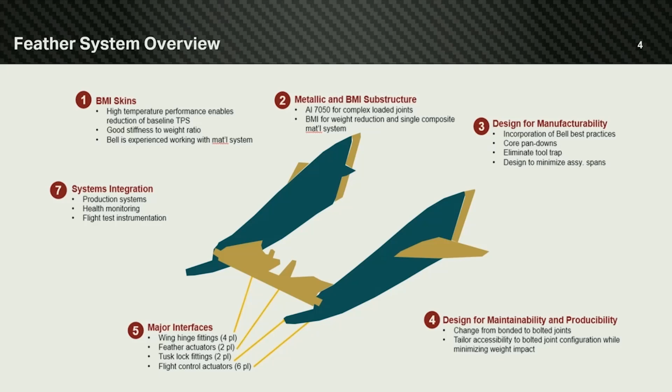So their thermal protection system previously was painted on or applied in a very imprecise way, and they had to sand it down to OML, and it would sometimes crack, and it was a huge maintenance burden. So their goal with the Delta program was to get rid of all that thermal protection system. It's a huge weight benefit.

They switched to BMI instead of the carbon epoxy material system that they had previously, and that was sort of the play there to improve the maintainability and the takt time and all that stuff. So we used metallic substructure and BMI substructure, metallic at the complex loaded joints, the big joints.

We had to design for manufacturability, producibility, so they were big on takt time and turn time, so they wanted to be able to go from producing one spaceship per year, which is kind of the rate they could do before, to 3 spaceships per year. So we had to configure the joints in a manner that enabled that.

We also had to configure the joints for logistics, right? Because previously Virgin Galactic had built all of these in Mojave, in their Mojave facility, and it was all hand laid up, and they had bonded joints, and they could build it up in one piece.

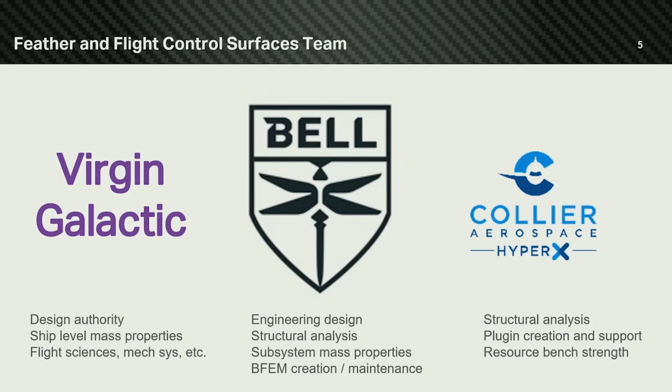They keep the ship level mass properties. They take care of the flight sciences, mechanical systems. But Bell is the detailed design, the engineering design. We do the structural analysis. We do our own accounting of the mass properties. We do a BFEM, we maintain our own BFEM, and we do the maintenance of that.

But then, so where does Collier come in? I'll talk a little bit more about it later. But the Collier team's role in this was really around - they were a supplement to the engineering analysis stress team. So they performed analysis, they supported part releases all the way through preliminary sizing to detail sizing to part release, and SCN creation and all that stuff.

They also supported plugin creation and then resource bench strength, which means a lot of the time we had things that came up and James and the team were able to flex and find somebody who potentially has a little bit of downtime to pick up some extra work for us when we need it the most. And that's important because then we don't have to go hire more folks. We don't have to figure out, when there's less work, what to do with those folks. So James has plenty of other work for them to do when the need is not as high.

All right, so the rest of the presentation, we have 3 other presenters. The rest of the presentation is going to be structured like this, and we'll kind of go left to right across preliminary design, weight out challenge, and detailed design. But we kind of wanted to give you all our perspectives on the different phases of the program.

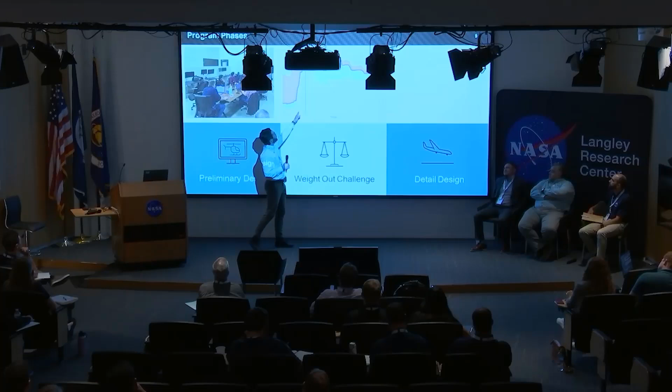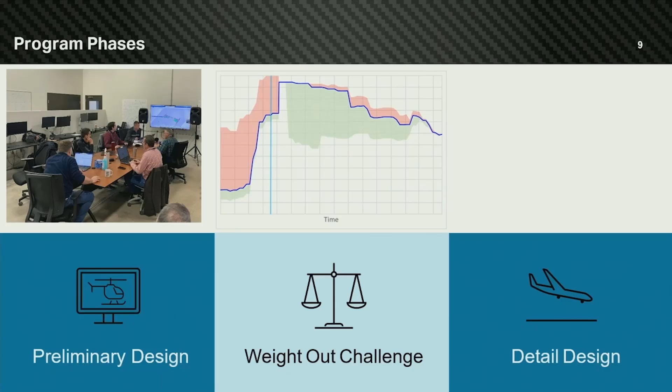We came up with a long list of opportunities, and you can see what we decided to do after CDR was absorb all of the weight risks, which are the red, and the opportunities, which are the green, and we said okay, that's status weight. Then afterwards all the green comes in, that's our list of opportunities that we put together as a team during the weight out tiger team.

But you can see since then it's marched down over time. I'll say that we've gotten to under our target weights. So we pulled about 500 pounds out of a 3,500 pound feather system. It's been quite a journey, but it's looking like we're getting there.

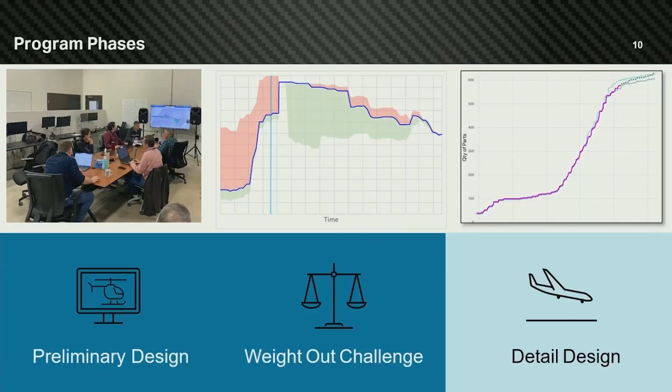And then detailed design. This is the part release burn-up chart, as we affectionately call it. Time is on the x-axis, and quantity of parts we have to get out the door each week, tracked at a very detailed level. At one point we reached a peak release rate of 55 drawings per week, including left and right hand side. Very aggressive, lots of night and weekend work.

So at that point, this is where the power of HyperX helped us quite a bit. We had spent a lot of time setting up our SCNs, as we call them, strength check notes, which is really just a stress report, to accept output straight out of the HyperX database, so our margins are getting printed right into the stress report. We had it set up real slick, so that definitely helped us quite a bit in the detail design phase.

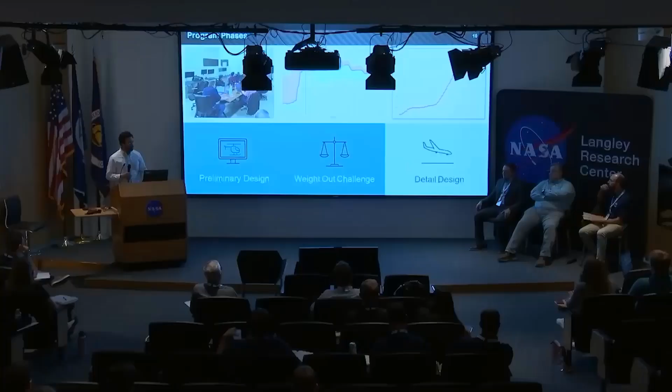All right, and without further ado, George, turn it over to you.

All right, hello everybody, I'm George DeLeon. Thank you for the introduction earlier, Brent, you really covered it well. As he mentioned, this is my first stint as a manager of a team. For 17 years I was an airframe stress engineer, or at some points stress lead, so it's also my first time working on a space vehicle. As you can imagine, two new things happening all at once, it seemed a little daunting.

When I first heard the team was going to be deploying HyperX, that was my one thread, honestly, because I had spent plenty of time working in HyperSizer, and the similarities to me are striking. That was a silver lining in running into the team and the challenges head first, that they were going to be using HyperX, and I said to myself, I can help there. I think I can help organize the team and orient ourselves for success. So a little bit about how we did that.

In the preliminary phase, just for time purposes, think back to late 2023, fourth quarter 2023. Basically our structure was in place, not without issues. There were still load path issues internally, which we were teasing out as we put more stress eyes on the substructure. But that's not what this story is about. We were essentially ready to begin preliminary design.

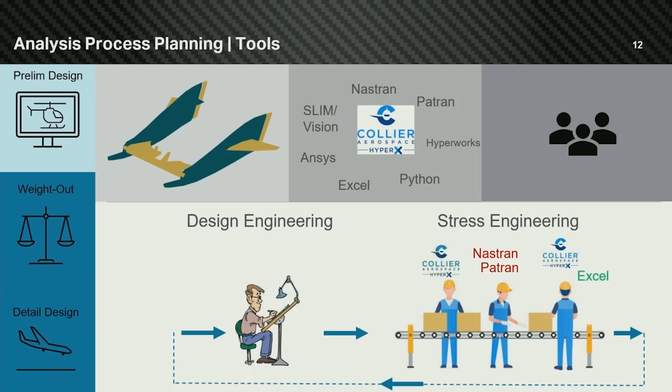This cartoon—I think this is, in my brain, what designers and stress engineers look like. The designers are a little more laid back, working late hours with their little lamp. The stress engineers are a little more rigorous—we for some reason dress similar, more conservative, more careful, with the hard hats.

All right, so a little bit of a deep dive into these analysis steps. I mentioned that the first pass—we'll call them point guard—takes the part and takes ownership of it. That's your main point person who interfaces with design, doing the initial acreage sizing, and for the most part we use HyperX for that entire step.

There are some key locations, some chunky parts, some detailed parts where we didn't feel comfortable yet with the use of either lug analysis or KT features, so we wanted to deploy other tools we felt more comfortable with at the time. But for the most part, that initial acreage sizing is heavily HyperX.

The next step, our stability analysis, was a combination of HyperX and Sol 105, as many of the presentations have mentioned, the use of Solution 105, Nastran.

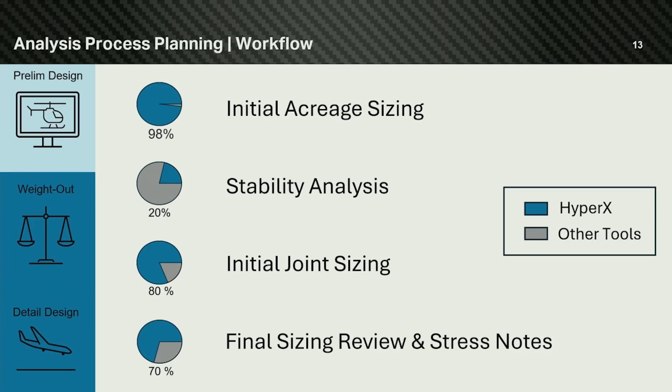Okay, so initial projections of our tracking of the feather to our current point, as already mentioned, was not looking good. I can't really undersell how much our backs were against the wall. We were roughly 16% heavy, or heading in that direction anyway, and we needed to do something about this. It was pretty much an existential crisis to really get that weight down. We were at an impasse, we couldn't really be there or close to it at all. So the goal became: get 500 pounds out of this structure, however you need to.

So naturally, we got to exploring everything. All right, what got us here? Not from the standpoint of pointing fingers at anybody or any tool, but from the standpoint of fixing the problem. So we inspected everything - whether it was the way we were arranging our folks, the tools, the processes, the workflows, all of that. We came to conclusions that it was nothing related to that.

It was all about the methods and the approaches. So what it came down to is, almost as a culture or as a way forward, we were fine-tuned to the KPP of quick turn time, and we were kind of overly focused on eliminating risk on first pass yield in development of the parts, which is a good thing, but we overswung the pendulum in that direction, and it was time to really scrutinize that.

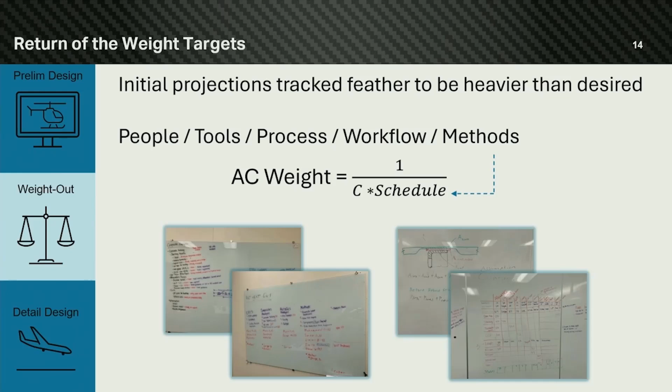So at this point in time, like Carrie mentioned earlier, we had a lot of eyes on us - leadership at Virgin Galactic, leadership at Bell. We all got closed into a room and said, all right, throw everything and anything, any idea you have, put it on the whiteboard. Let's start talking about it, let's start thinking about it. That's actually a picture of four different walls in a room that we just filled up - we probably ran out of room. Not intended to convey real information, but just to state that this was the moment to put everything on the board.

Basically, go back to square one where we needed to, but also don't forget we have to do whatever it is we do to solve our way out of this. We got to do it very fast, and now even faster than originally.

The bottom right corner there is kind of our design of experiments, if you will, just a hand hack at it, because we knew that we wanted to know how some of these weight savings ideas interacted with each other and all that.

So with that, we could not just let it be the Wild West. We couldn't just take ideas. Again, I don't believe in telling all the engineers, here's the ideas, go run, do them all. No, we had to study them. We had to wrap our arms around them. So this is intended to help describe how we went about doing that.

That's not a martini glass. That's a funnel. We'll call it the funnel of sanity checks. Basically, we pumped all the ideas through studies.

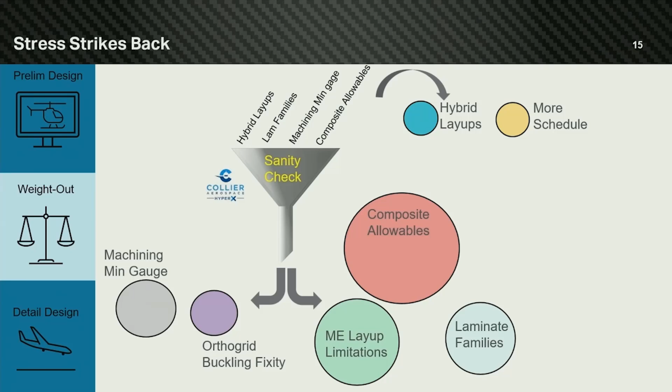And then the ones that didn't quite make it, I'll say we didn't necessarily say, okay, no, never. We just said, let's put them to the side for now. And we ended up calling these Group B weight savings, and Group A weight savings. The Group A, we were just going to do. We're going to incorporate them and organize ourselves to go ahead and put them into motion.

The Group B were a little more costly or a little more time consuming. One is just straight up more schedule. That is the idea, just take more time. Multiple presentations today and yesterday just talked about how if you just keep going, you can save more weight. But we didn't have that time. But it is a Group B option that we had, such that for a given part, if we're not meeting the target, there's an option still. Let's go revisit it. Let's just sharpen the pencil on it.

It would be impossible to tell you guys how many, and really describe in that much detail how many ideas we came up with. It was more than 20. And the way that the team performed and knocked these out, it was pretty incredible. Not just our team, but the Collier team that was on board helping us.

There were cases where we'd still be in that meeting room with the executives, with the leadership, chief engineer at VG and everything, and we said, well, we'd really like to understand this one or this other one. Maybe it was including uniaxial tape along the lands of caps, or just shifting gears on a safety factor — not a safety factor, but an uncertainty factor that maybe we were a little too conservative on.

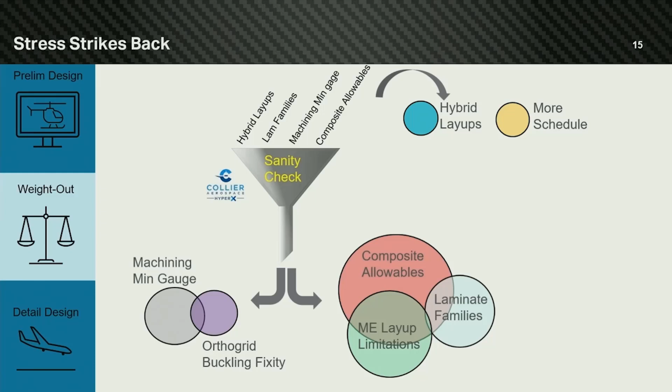So before just reporting out to leadership, hey here's the total amount of weight we can get out, we said we've got to deal with this problem. We have a lot of overlap, a lot of losses in trying to pump all of these weight-saving initiatives into the design at once. But at the same time that we realized we had a problem, we kind of said, wait a second — we got a solution too. We got databases that we can run with all of the weight savings initiatives at once, or even combinations of them.

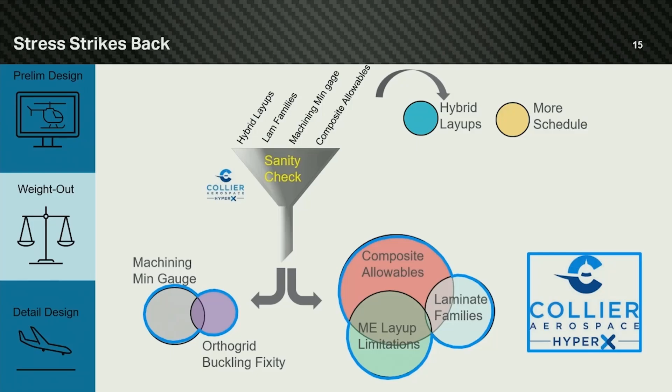So without HyperX available, this either leads us to the wrong answer — and what I mean by that is we pump the brakes too early, we don't look for more weight and we start moving — or we just slip schedule badly. This might be, from my perspective, the biggest takeaway from how we solved this problem. I think what we ended up doing in a matter of 2 to 3 weeks would have taken easily 2 to 3 months, if not more, with other tools.

So coming out of all of those studies, we came up with this workflow. And again, I've got all the pieces of the workflow where the HyperX tool is kind of involved.

So like I mentioned, we had Group A sizing ideas and Group B sizing initiatives. This is the way we ended up treating every part as we went through our sizing. We would start with our Group A sizing — okay, just size it, implement all of the approaches that are going to save us weight. Then, all right, let's check the part. By this point, we had spent time developing part-by-part weight targets for every single part. Obviously the important ones were the really big parts — we had high focus on the part-by-part weight targets on things like boom skins.

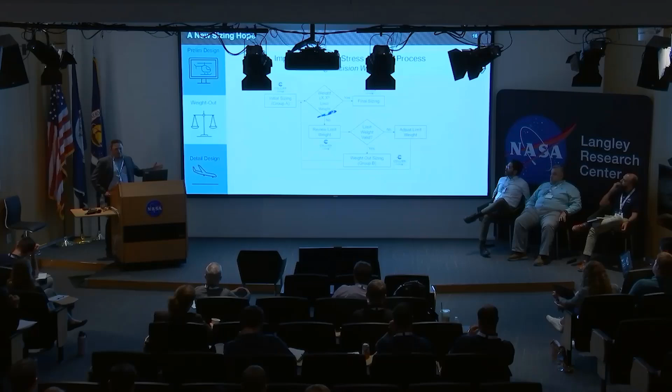So if it didn't pass your target weight, your limit weight, is it the end of the world? I don't know, let's see. We go down and review the limit weight. The reason I have a HyperX box next to review the limit weight is because HyperX was involved in performing those studies. Those limit weights, as they stood, leveraged what we thought we could do out of those studies. So it was involved. Maybe there was something up with how we performed the study, or maybe something else. Maybe we just got too aggressive with that one. So okay, you go through at least that sanity check. All right, is the limit weight valid?

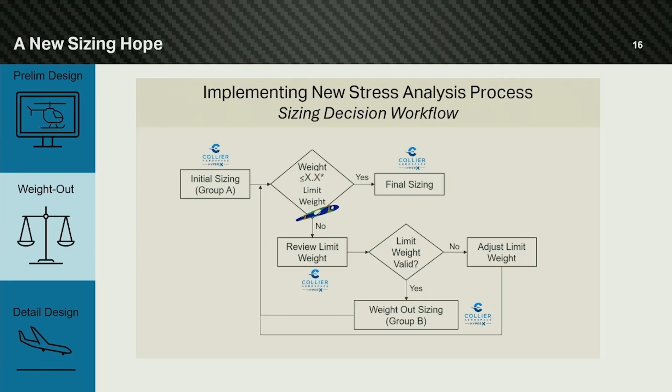No? Well, let's go ahead and adjust it, whatever it was. Let's put a fraction on it, even to the point of finding weight in another part within the same assembly or something. If it is a good limit weight and we really need this part lighter, all right, it's time to look at weight out sizing Group B activities, whether that's just passing back through, iterating a few more times, whatever it is for the part.

The feedback was literally, George, I think the hats are a little political. I said, I didn't write anything on the hats. I'm just being observant, our company logo is blue, and our Texas home, Bell, is red. Nothing political, I promise.

Anyway, so what I mean by landlocked is there was a really high importance in maturing the boom skins. You already heard about the scale of these things. They've got basically 22 or so core stiffened areas and numerous substructure components attaching to them. And the path forward, to really open up what we used to call the floodgates,

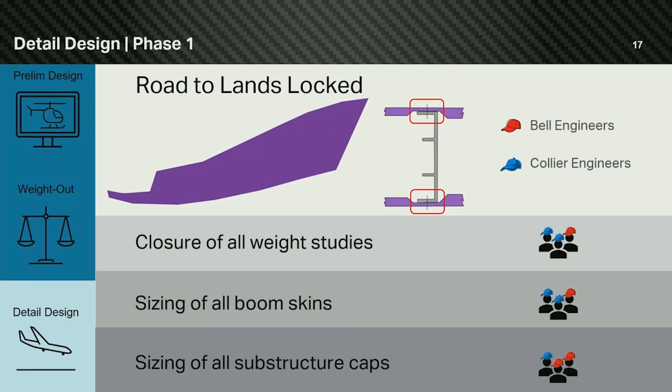So I guess I'll go kind of one at a time. And in this case, the hats are sort of indicating Collier versus Bell involvement. So I'll just tee it up this way. This was a point in time where we could have easily shied away with how involved Collier was as a partner, as teammates. There were leaders asking us, hey, is it time to pull back the boom skins? Do you guys want to tackle this phase and maybe give them substructure parts or something?

And I give a lot of credit to Max here. As we talked about it behind closed doors, and now to everyone, he said no, these guys have gone through iterations. I know we had a high weight skin, but nobody knows it better. Nobody knows the process and the sizing. With our guidance, let's keep them very involved and let us do the talking to the leaders. No, this is the way, we need Collier, we need the team.

And there was a lot of pressure on them. I mean, you can hear that from Justin and team. But they did it, man. They were up to the challenge for sure.

So at this point in time, we were needing all of the weight studies to close. There were some trickling in still. There were some even material trades at this point. Those were all kind of coming to a close. And we needed sizing of all the boom skins, and I mean almost every aspect of them, especially joints and acreage. The buckling, we kind of determined that some of the buckling could come in after, but really we needed iterations done, and we needed the joints and the acreage to be very, very firm. We needed to call that final.

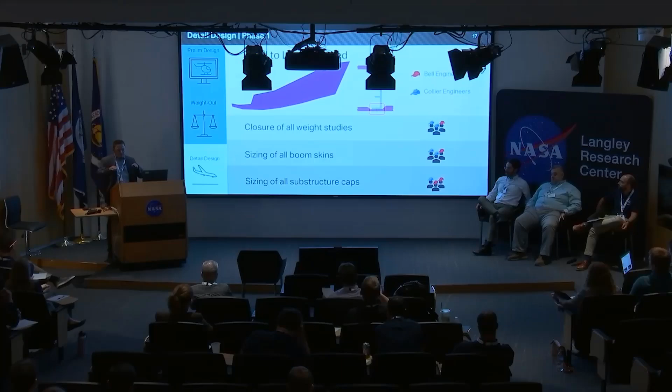The reason behind that is that we've got ply drop rules. Every company probably has their own discrete set of rules for how aggressive to reduce the layup. And if we went with an approach where you just pump meat into the land for the skin, you end up essentially trapping weight, because it takes so much distance away from that land to get that material out per our own guidelines—we were kind of eating more than we wanted to there.

So, without the amount of iterations and the abilities of the guys—I mean the iterations with design as part of it—I'm anxious for you guys to listen to Justin's part, where he's going to talk about how that interaction with design happened. Without all those iterations and all that time looking at it, this doesn't jump out at you. This is not intuitive. So we just leaned in. We said, no, let's just try to put meat in the caps and make it part of our weight savings approach. So, all right.

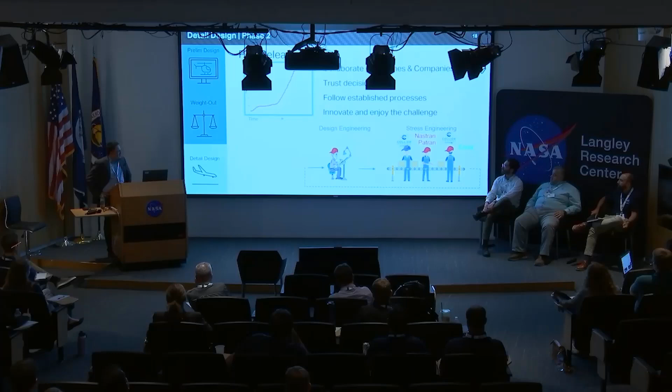Okay, finally, kind of repeating the part release grind that we saw earlier. I can tell you that essentially—I know there's no scale here—but in a matter of 4 months, I'd say 4 to 5 months, we got through our detailed part release, our 500 plus parts that make up the feather structure.

How did we do this? We just collaborated across all the companies—VG, Bell, and Collier. We trusted our early decisions. There was no backing down from it. Whatever we had put in as our process and how we had aligned ourselves, it was time to just double down on that, and that proved dividends.

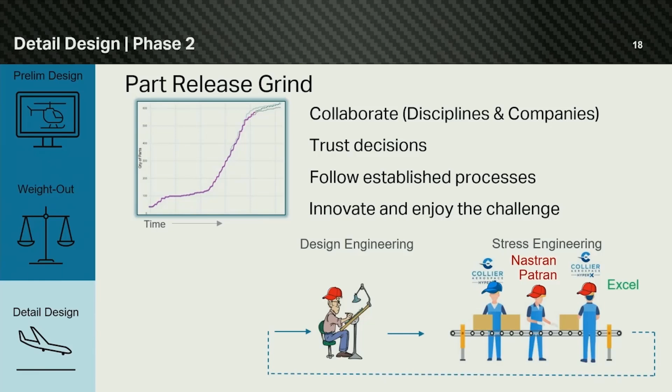And then so we established—we followed our established processes, and we didn't forget to enjoy the challenge. That was something that was hard to hear from my team when we were up against the wall facing this impossible challenge. I told them, this summer—last summer in this case I'm talking about—it might suck. We might be putting in some crazy hours. We might find ourselves pretty stressed. But at the same time, it may just be the most fun you ever had in your career to talk about later on when we succeed.

And so, anyway, it's really cool to be here telling you guys about how we approached it and how HyperX was used with manager level details. But I'm excited to let the next two guys, which I consider absolute ringers at stress analysis, go a little bit deeper and give you the real details of a few examples of how we went about it.

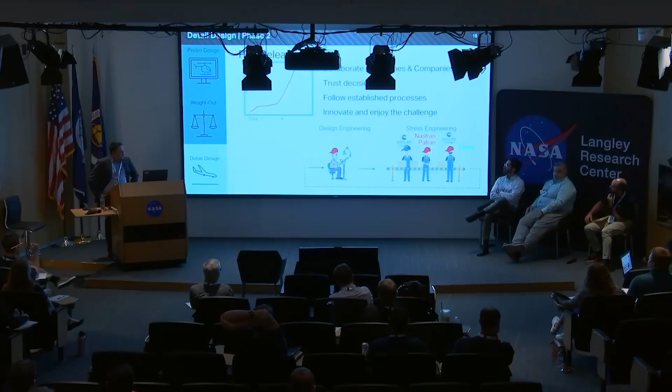But I mean, I can't state enough how we were operating basically like a machine. At this point we had the hats on, different orientations. The blue and the red at this point had crossed aisles—we're working alongside each other. So yeah, it's been fun, and it was just amazing to have HyperX and to depend on it as much as we did, and to challenge it the way that we did. So with that.

Hi everybody, I am Max Silva, stress lead on the Virgin Galactic program at Bell. And I love when my managers talk about how easy things are, package here, moving things around. But with that being said, today James said something that is very important.

HyperX was created for stress engineers, right? And to get to the point where they were presenting for you, there is a steep curve, especially going from a conceptual phase all the way to releasing.

One thing that's funny to mention is that Kerry was trying to find people within Bell that could join the program, right? And he found the most experienced people, very nice people. I know them all, like them all. But our average year of experience was 20 years.

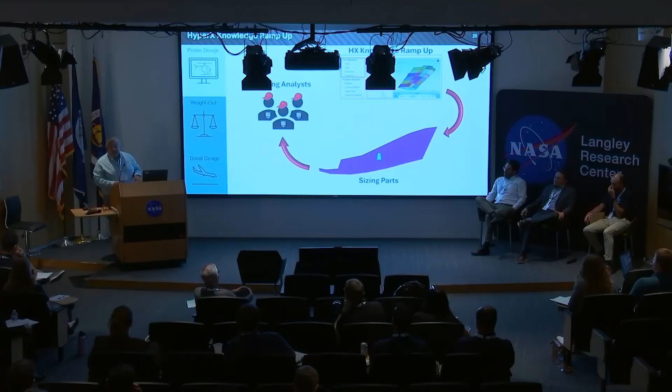One time George also asked me, hey Max, show me how to do the HyperX. So I go to his desk, and he starts clicking stuff. And then I just tell him, if you don't stop clicking, ping, I can't help you - because he was just click, click, click, click. It was so fast, I couldn't even do anything for him.

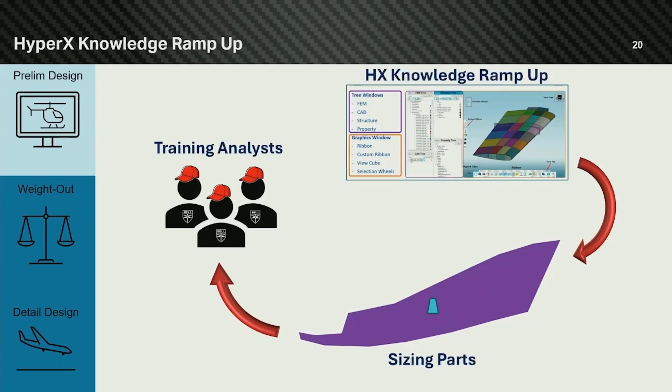But anyway, that's how my involvement with HyperX started. One week of experience, and all of a sudden I'm the guy, right?

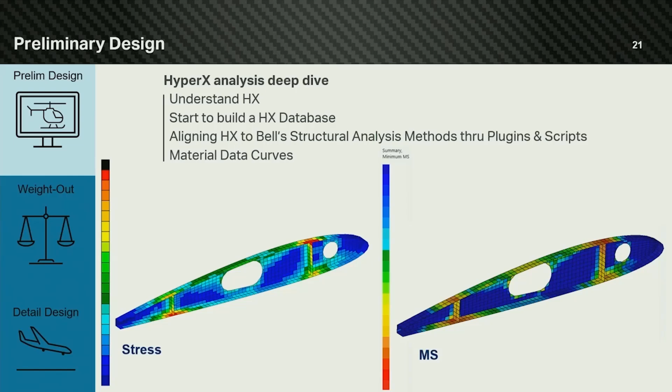They didn't take that easy. They wanted to understand why HyperX gave us margin of safety. They weren't comfortable seeing plots of margin of safety. I asked, what is the issue? They said, well, we don't know if it's capturing the hotspot. So what I did - this is not part of the program, by the way.

This is a different program at Bell. So what I did, I started playing with HyperX. You see two plots here - they're fairly identical. One is a margin of safety summary from HyperX, and this one is actually from Patran. If you switch how you see your stress levels, you can do an element field and stuff, and you can see on this one they're very similar - they're actually hitting the right spot.

So I had to present them by example. Hey guys, it is doable, just give it a try. And that's what I was trying to do.

It's okay, so they took it. They're taking it well, but they're still complaining, coming to my desk every day - a big line in there. Just like when you go buy cold cuts, they need to get the number. That's how it was. I became a 1-800 call - instead of calling you guys, they'll come to me all the time.

But anyway, that was fine. But we still need to validate and see how the tool pairs against the Bell way of doing analysis.

So there was a major setback. Some people were saying, no, we do it this way, this is the Bell way. I said, okay, so after training two very experienced guys and one young one, we decided to do a deep dive - let's go understand everything that we need.

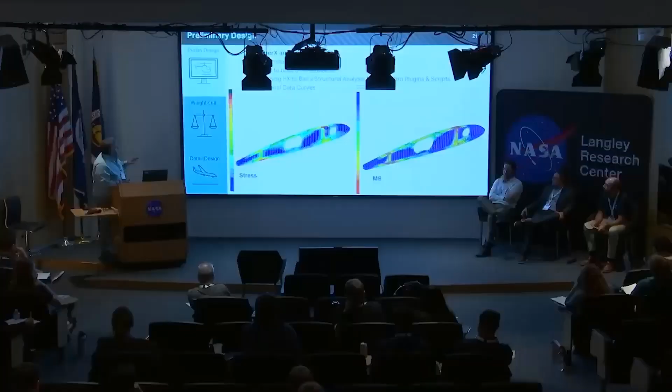There were a few people sat on the side who said, we need a new FEM because we cannot continue using a FEM that is not from this aircraft - or spaceship, need spaceship, otherwise they get offended. But anyway, that's what was happening for us on stress. They were discussing other stuff, but we were going crazy on our side.

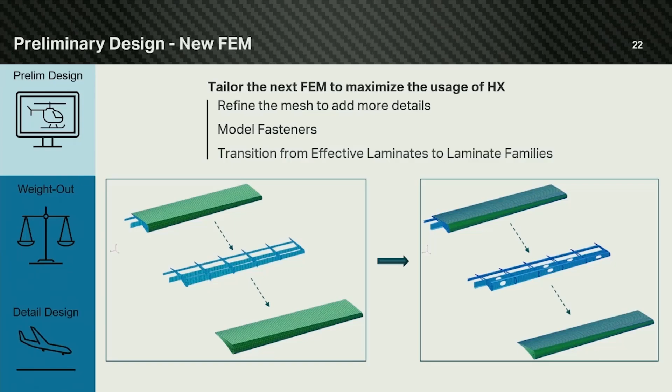So the conclusion, even before we start sizing stuff, just so you have an idea - we went from a FEM that is very simple, trying to maximize the usage of HyperX. That was the goal. If we were to achieve the level of usage of HyperX we needed, we had to refine the mesh, have all the details, so we can push as much through HyperX as possible. So refine the model, model fasteners, and walk away from effective laminate and start developing families.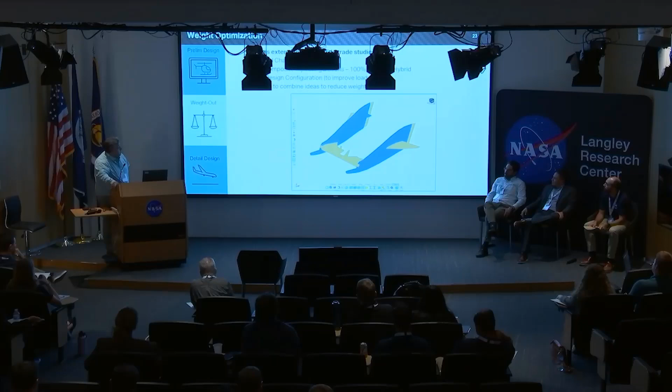As George mentioned before, it was a scary moment at Bell. They were locked in a room for 2 weeks deciding everything, and I was in charge of making sure everything was being done - pretty much a livestream. I had ears inside, which was pretty much George and Amber, and they were texting me or IMing me, do this, we need to know now.

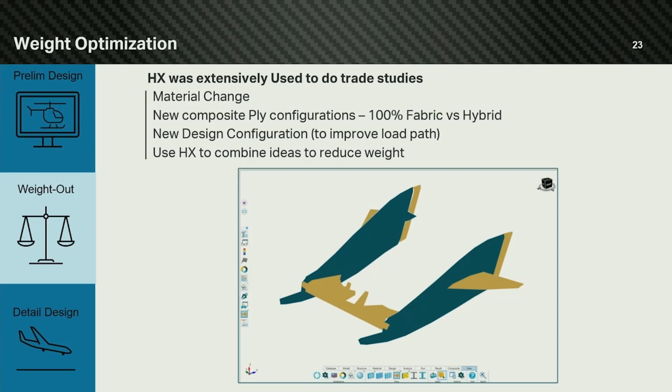So I had hours to flip stuff for them. Other than changing material that we could push easily, most of the stuff they were asking us to do would take weeks, if not months, to do. But we decided to go 100% HyperX. We can't pass on HyperX - we just show its potential. We're looking for the potential: can we save the weight or not? So thankfully we had HyperX on our side. Otherwise we wouldn't be here today at the conference, and we wouldn't be finishing the program anyway.

I got the red light, guys. So that's my final slide anyway.

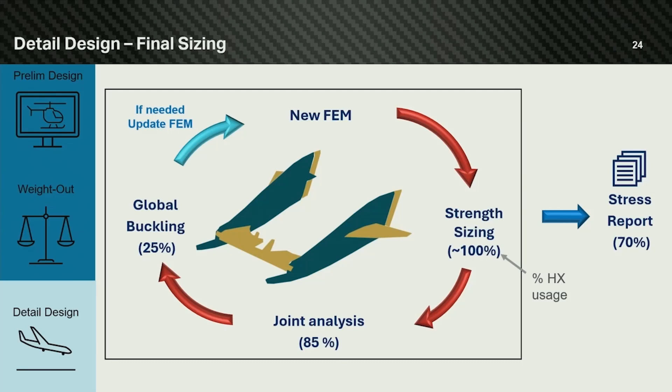So once we walked out with weight savings, we had the process, right? We had the experience now. They were scared, they still had to meet a deadline and stuff. On the stress side, all those people who were concerned about HyperX - we had that smirk on our face. We were just laughing because we knew it was possible. We had the setup, right? We knew we could do strength sizing almost 100% in HyperX.

We had our joint analysis set up. Everything joint-wise goes through HyperX to a certain extent - we have the shear, tension, and bearing in HyperX. Everything else we made into a script or plugin. Bearing bypass is the only one we're forced to use outside - that was a decision not by us, but by VG. They wanted to use their tool, but we still export the data, put it on their spreadsheet, good, move on. Buckling was also a decision at the end to keep doing global buckling outside. Once we do that, if we need to update the FEM for any reason, we do it. If not, we kick out the stress report.

Stress report - as we were going through the process of investigating the tools, we developed a stress report in Excel. That's very cool - it actually reads the output files from HyperX into it, populates everything for us, and shows the hand analysis and the HyperX margin side by side. So for each critical margin, we have 2 margins of safety. They also became a way to check the analysis fast - if they match, good, that means it's good on both sides. If it doesn't, then we go there.

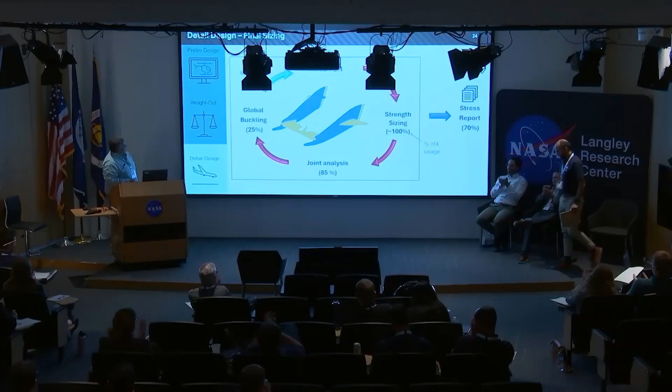The light just kind of, okay. All right, no time. All right, so yeah, I'm going to kind of continue the discussion running through each of these phases.

So, actually, all my notes are done, so I'm going to go here. I don't know what happened. Oh wait, I see them. They're all kind of off to the side. Squished it over on the side. Where's my mouse? Don't have one. There it is. All right.

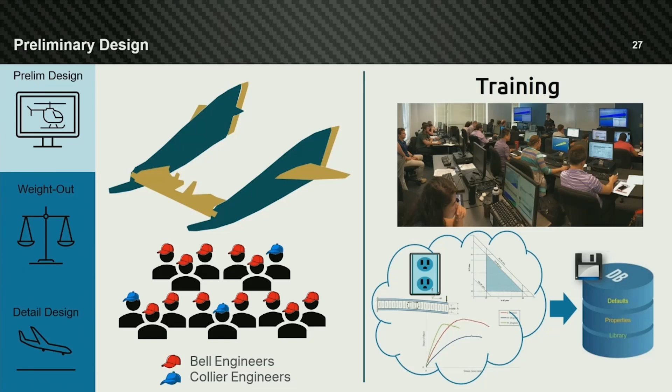For the preliminary design, as you've heard, we had a pretty large challenge - we have two main subsections, each with many parts to design and size. I think initially there was 50 main parts, and that's not including all the fittings and smaller parts.

Rapid onboarding of analysts - as Max said, he had a little ticket taker of people coming to him. We started our on-site visits, doing on-site training, virtual training. We even had some Bell-led seminars - there was Metallics with Matt or something like that, and Composites with Collier and friends.

As mentioned, analysis guidelines and best practices were all being reviewed and documented. Material data was going into a library. And while all this is happening, the clock's still ticking. The days are going by, and that schedule isn't going to pause for that. So we needed to find a solution to help expedite things.

So obviously, as we mentioned, enter the enterprise database use case. As a couple of people have mentioned, you can pull in a GFEM and split it up into multiple parts. I'm going to gloss over some of these things since some have already been mentioned. But the first thing we did was implement what we called an integrator.

This was somebody at Bell. Their first task was to control what we call the company database in this case, the templates. This holds all the material data, the analysis methods, everything all in one place, making sure that's all up to date and pushed out to the team.

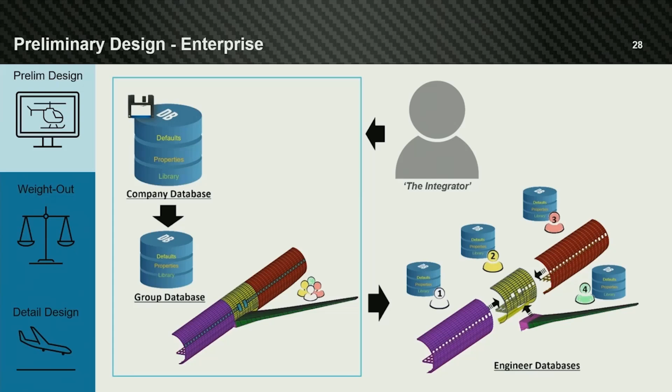The second responsibility of the integrator is managing the main group database, then splitting that up into subsections. If needed, those subsections could be led by an additional section lead, or the initial integrator could maintain it themselves. Along with that, making sure the shared folder was kept up to date, as well as working with management to coordinate the part sizing schedule - making sure analysts were getting the right databases when they needed them, and getting them back when they needed them.

So with that, you have your typical breakdown. We use the include file structure to create these databases, and we use the ability to have a read-only structure, so analysts could get an understanding of where loads were coming in, interfaces, things like that.

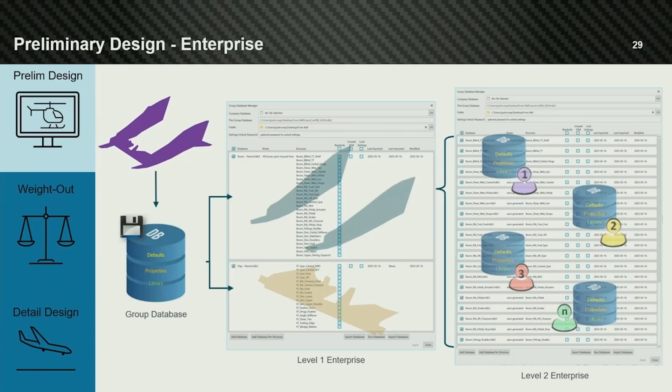I think the big takeaway here was this allowed users, both as experienced as Max was at this point, to experienced analysts that never touched the software, to some pretty new analysts coming on to Bell or the program starting out fresh. This was basically a quick start tool where the part was loaded in, all their methods and materials were set up, and all they had to do was go through the training of zoning things out, how to assign properties, which toggles to switch on for their analysis properties, and then from there they could just go.

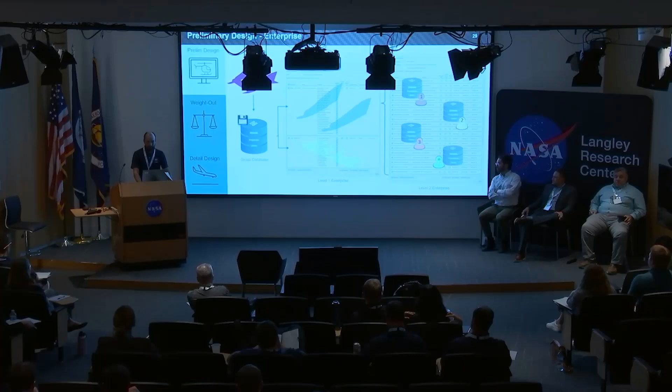On top of this, it also allowed for quicker review of the work as these databases were absorbed back in. As you've seen, we do throw out a change log of things that might have been updated. If those are not approved, you don't absorb the database, you kick it back and say, hey, this method isn't approved, this approach isn't approved, so you need to correct that. Otherwise, bring it in. And you could also iterate this process with HyperFEA. This allowed us to large-scale disperse parts and keep things on track.

So moving on to the weight out study. As mentioned, as we all know, this y-axis is weight savings. So you can achieve more weight savings, but with that, you do take a hit to the schedule.

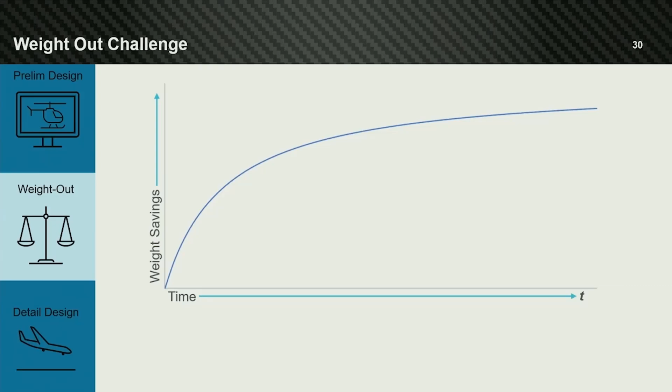For this weight out study, there was the need to rapidly identify areas where we could do targeted optimization. As the time clock is ticking, there's costs being hit, just resources, schedule costs, all that. So what we can do is apply HyperX to this schedule, and as we've mentioned, help pull that to the left, and you see here, you can achieve the same weight savings, if not more, in a quicker amount of time.

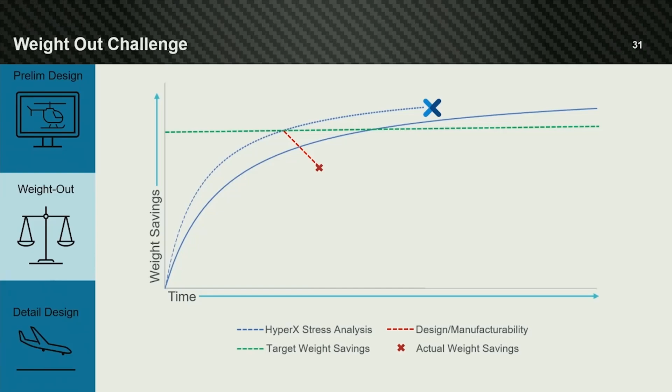Several people here have discussed the options there, the quick trade studies, things you can do, material trades, configuration trades. But what I want to focus on is, what do you do when design comes in and does their work? You could optimize the part all day, but if they can't build it, then it doesn't matter. So design's going to come in and do their work, and we're going to take another weight hit from what they're doing. This was another identified point that we realized we needed to find a way around, to hopefully bring that red X closer to our initial target, while also shortening the time spent.

So what we did was we started very heavy collaboration with the Bell designers. This was both us on the Collier side talking to the Bell designers, and then Bell Stress with Bell designers. And basically we had this iteration, this process of passing essentially boundaries back and forth.

From HyperX, you've got your zone boundaries. From CATIA, we've got grid cell boundaries. We would send our optimized zone boundaries over to a designer, and they'd say, yeah, that doesn't really make sense, I need to shift these over because I can't do ply drops right here, can we do that? And you do a couple passes, and you kind of finally land on something.

What this helps us do is get ahead of the work. It lets the designer get ahead and start thinking about these things, because they've got an idea of how many ply counts are going to be in this area already, since they've seen the numbers. Their hope is it's going to go down, but they can at least get a feel for where they need to maybe be more aggressive with their ply drops, see where we might need to take in a reduced allowable from that fact, things like that. So we can keep sizing as they work through their processes of doing the ply sequencing, which will then be passed to manufacturing.

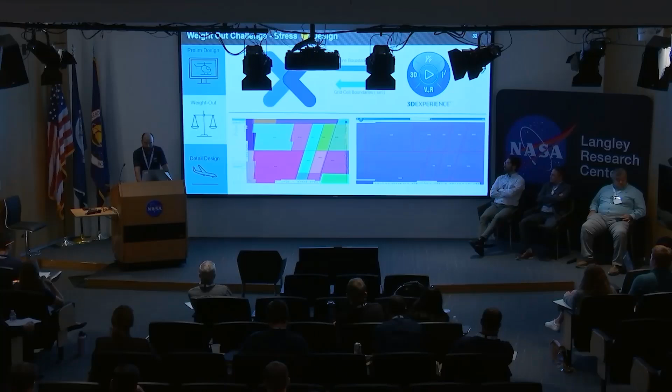So with that, we were able to develop a system. Bell had a specific way they were doing their ply books—over and undercore ply books were actually separate, while I think our native methods just spits out one. So we actually had a scripted process that would kick out an over and undercore ply book. And since we had this zone-to-grid-cell-name mapping, we could pass design a ply book.

And that process could also go the other way. We could take a ply book from design and bring it right back into the database, update ply counts immediately, and get new margins for areas where they've either increased plies, theoretically getting a better margin, or maybe there's an area where they wanted to reduce plies.

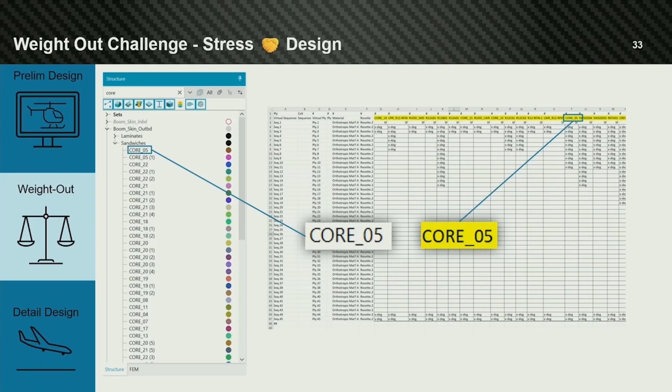The big point here is to basically try to eliminate the transfer of data through PowerPoints. I will say at the end of it, we still used a good bit of PowerPoints just as a quick reference for people to look at, so they didn't have to open up a database or CATIA. But this was one of the quick ways we were able to update models between stress and design.

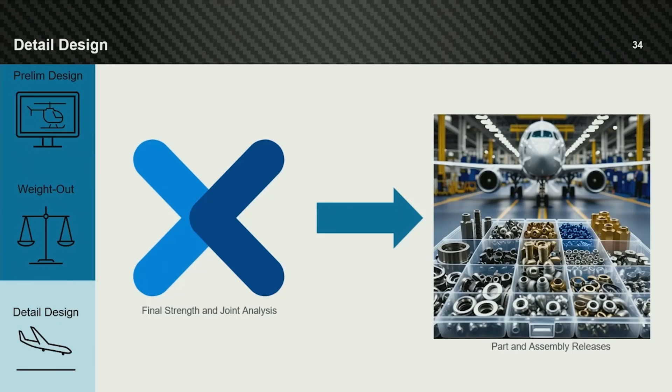So then we move into the detailed design phase. For here, we've got part release. We have a need to be able to rapidly update our analysis model to match the CAD model. We need to, as closely as possible, represent the as-built parts. We need to stay aligned with any revisions that are happening, make updates quick, see what's going to work and what's not going to work. We need to mitigate any negative margins that might pop up after a FEM iteration, as they tend to do.

And then also we've got assembly releases. We did the part level joint analysis, but we've got to do a full assembly release, basically ensuring the joints between design and stress are aligned. With this particular section, we had 10,000 plus fasteners that we were having to manage, that we tried to keep same within the bay, but sometimes you just have some peaking areas that kind of drive fasteners to size up, and you can't really avoid it.

So how can we do this? Like I mentioned, traditional methods use PowerPoints, prone to human error or just misinterpretation in general. And so one of the things we can do is simply import CAD geometry. This is a pretty straightforward picture here. We basically take the individual ply boundaries from the designers and pull it into our database.

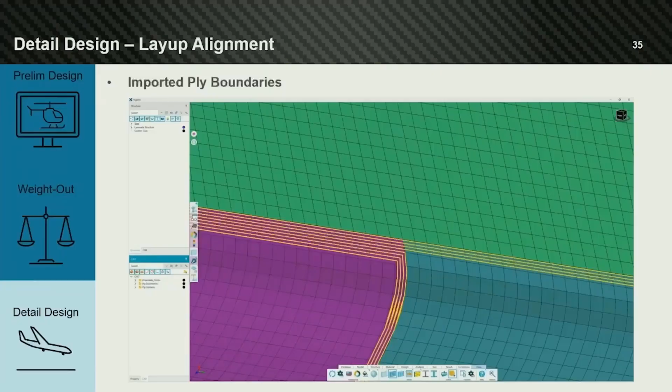And here we can verify that our ply counts are correct. We also have the opportunity, if we have a couple elements popping up negative, to go in and dig deeper and see if one of those elements happens to fall in an area where we might have more plies than we think, based on the zone-based analysis. I think my assigned designer was really happy when I stopped asking them, through an email or a text, how many plies do I have at XYZ location—getting 5 to 10 of those emails a day where I needed an answer quick. So that was very useful.

Another use case I don't have a picture of, but bringing in solids: the as-built part has drain holes, it has borescope holes for inspection, and some of those are not modeled. Our notched allowables can go up to a certain hole size, but someone gets a drill in their hands, they like to drill as big of a hole as they can. So make sure you've got the appropriate knockdowns there, and make sure the analysis in that area is substantial enough to account for that hole.

Unfortunately, we were not able to use this—sorry, Bell. But I did want to highlight, as August had shown yesterday, this was something I wanted to implement, but with it being such a new feature and our schedule, we just didn't quite get a chance to go from stress to design. But definitely next project we will.

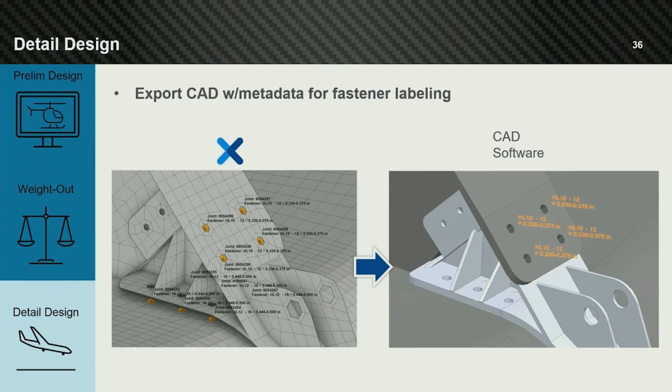But essentially this is showing the as-analyzed fasteners from HyperX, sending that data back to the designer. I know this would have saved a whole lot of headache if we had had this capability at the time, because again, we were using PowerPoints, and a chunk of us spent a good amount of time reviewing those PowerPoints versus the CATIA model versus the HyperX analysis. So this is something that would have definitely cut a lot of time off several analysts.

So how can we take what design has, with the joint analysis, with these 10,000 plus fasteners? How can we take what they have and leverage that on our end?

Bell had an existing process. They used these CAD vectors, these line vectors that design would send them. They already had in-house scripts that would create a spring element, apply a property based on that, and assign the correct stiffnesses to the joint.

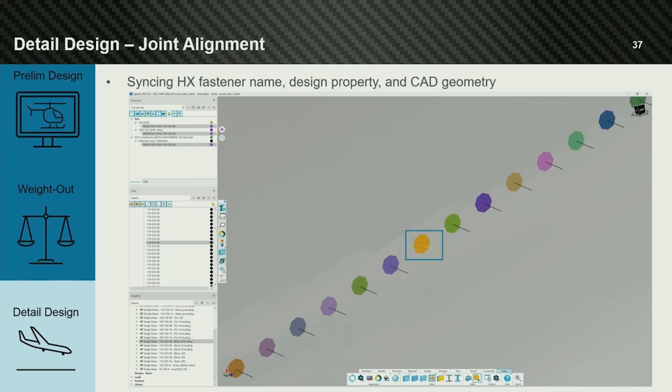I started digging into those files that were being sent over and noticed that design was nice enough to also include the fastener type and diameter in there. This was actually a really simple thing, because Bell was already using this fastener type to determine the fastener stiffness for the P-bush card.

It was a very simple update to their script to write in a comment per P-bush that HyperX can read. We can read in preprocessor comments, in this case Hypermesh comments, as a P-bush name. When you load it into the database, it tells you this 110-223-06. That is a fastener type for this location.

Along with that, we can read our CAD and see their line vector also has that name attached to it. And we just happen to have that fastener in our library because it's the correct one. So now we have a way to verify we have the correct fastener between design and stress.

We can take this one step further, which we will be doing probably next week, it sounds like, at some point.

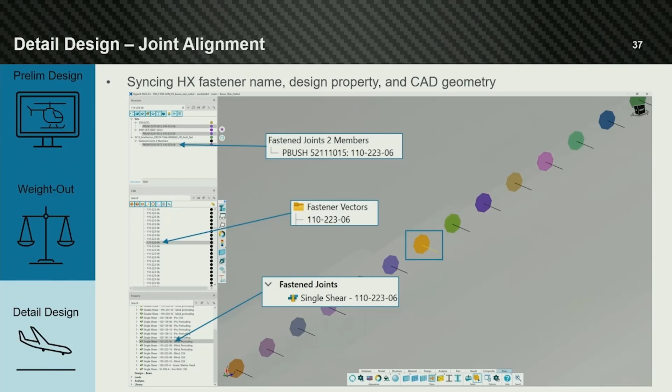But we can script this process. We have a joint design property here, and we have the fastener type, and that's a pretty straightforward script to go in and read these thousands of individual HyperX point joints and assign the proper fastener type, which really beats looking back and forth between a PowerPoint, as I have done many times. So I look forward to utilizing this again and again.